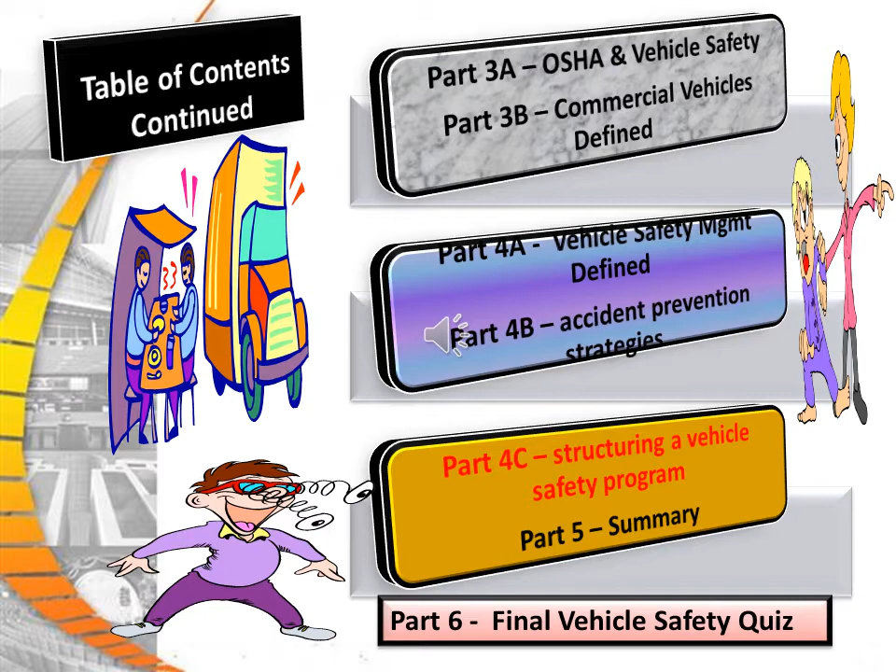Part 1, Introduction to Vehicle Safety.

Work-related roadway crashes are the leading cause of death from traumatic injuries in U.S. workplaces. They continue to exact a substantial toll on American workers, accounting for nearly 12,000 deaths between 1992 and 2000. Deaths and injuries from these roadway crashes result in increased costs to employers and lost productivity.

Workers may be pressured to drive faster and for longer periods and to use technologies that may lead to inattention to driving tasks.

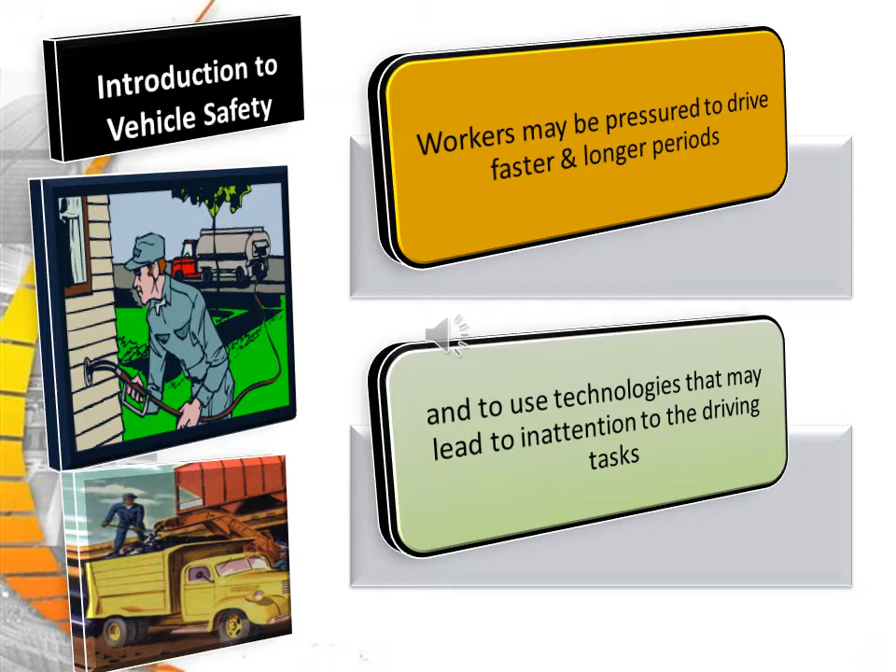We will review the main elements of managing both vehicle and driver safety, discuss OSHA's Division II rules for commercial and industrial vehicles, and talk about management policies on driver screening programs.

The total cost of a vehicle accident usually exceeds the amount recovered from the insurance company. The majority of all motor vehicle accidents are caused by driver error or poor operating practices. Companies can control driver error by implementing a program of driver selection and other management controls.

A vehicle safety policy statement is absolutely necessary, and it should be vigorously supported by top management. A vehicle safety program administrator should be a position occupied by a member of top management. And the driver selection program should contain some important selection criteria.

A vehicle safety program's main components include a written safety policy statement developed, supported, and enforced by management.

A vehicle preventative maintenance program will include inspection reports, detailed service logs for each vehicle, an efficient system for accident investigation, including emphasis on fact-finding, interviewing, detailed reporting, root cause analysis, along with appropriate corrective actions and follow-up procedures to help prevent future accidents.

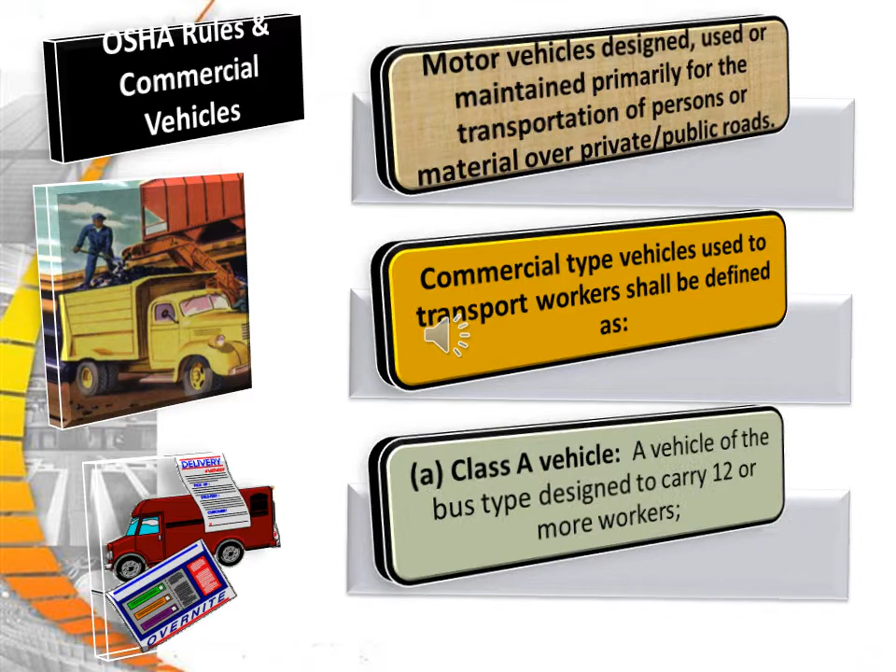Class B vehicles are vehicles especially built and accommodated for transporting work crews in compartments separate from space used to transport supplies, tools, and equipment, such as vehicles commonly used by public utilities. A Class C vehicle will be a vehicle of the flatbed or pickup body or dump truck type, or similar open body construction.

Class C vehicles operate near power line requirements set by OSHA, explained in OSHA's vehicle components. Flashing warning lights are required by OSHA, and the construction of the vehicle is also specified by OSHA.

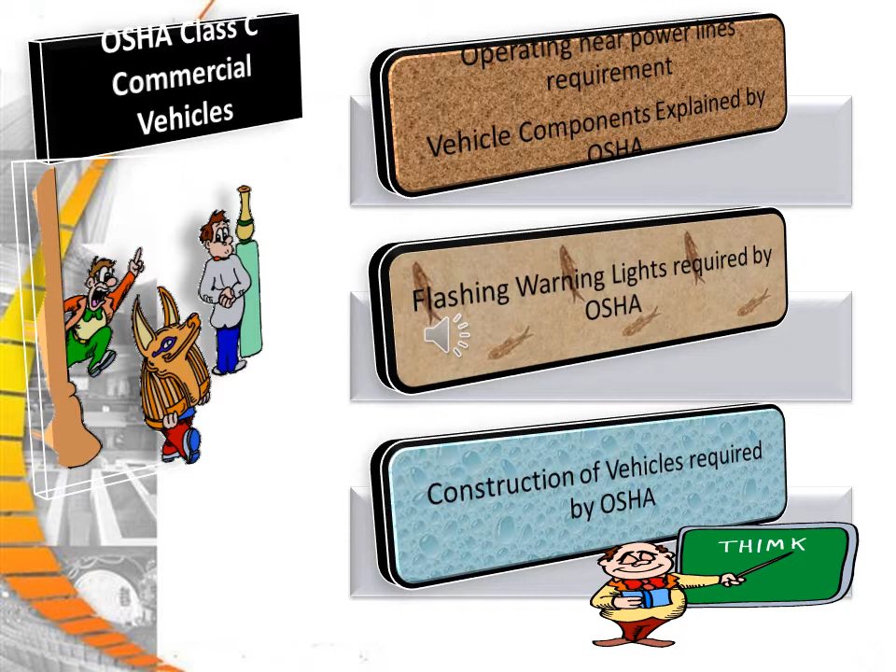Class C vehicles are prohibited from hauling explosives. They are required to have overhead protection, and they may be flatbed trucks, dump trucks, or pickups, not to be used to transport workers, with a few exceptions.

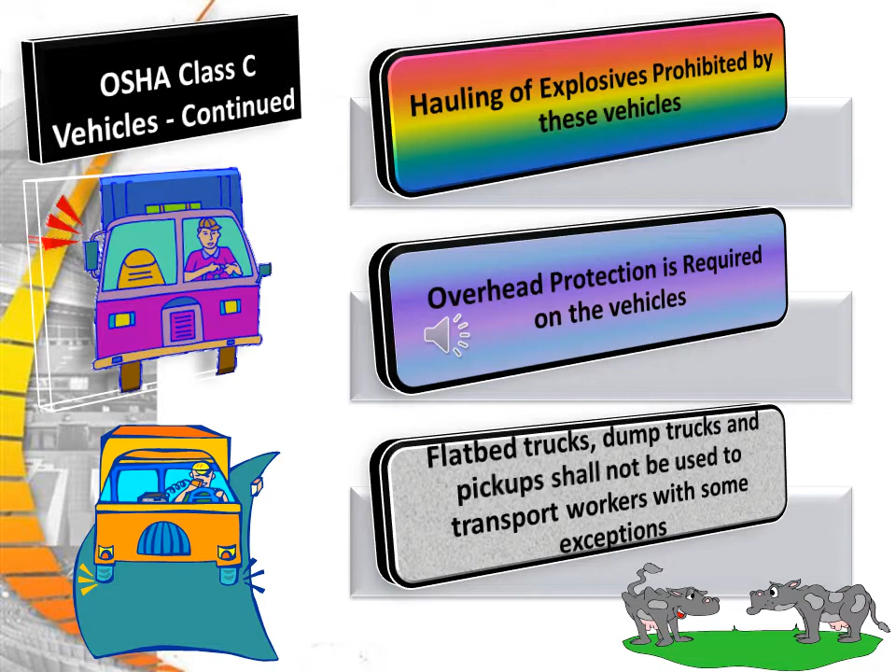OSHA's commercial vehicles also define Class D vehicles, which is a vehicle of the passenger car or station wagon type.

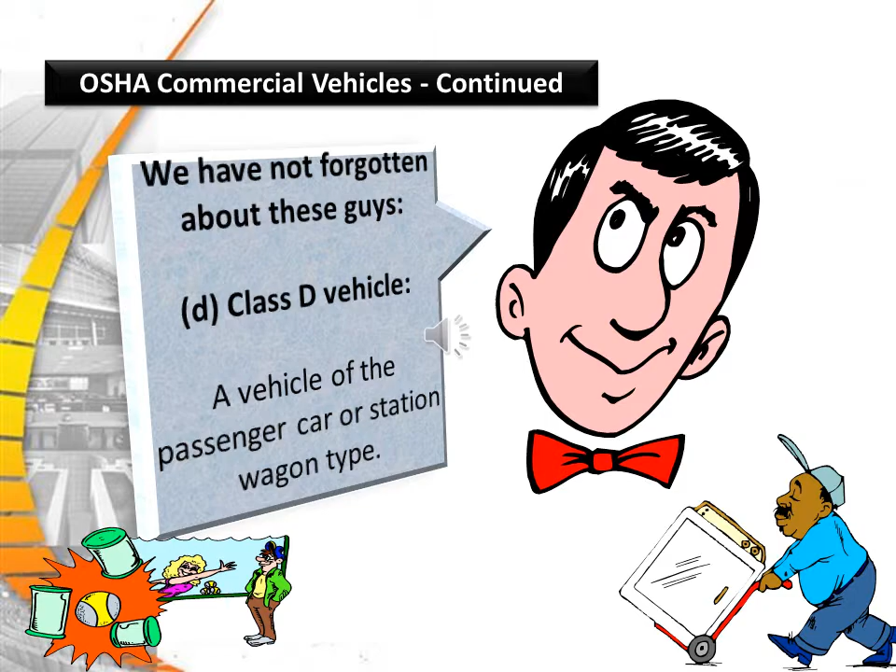Industrial type vehicles are defined as vehicles designed for non-highway usage, primarily for pulling trailers or other mobile loads, straddle trucks such as lumber carriers, powered industrial trucks, or other types of vehicles designed especially for handling materials.

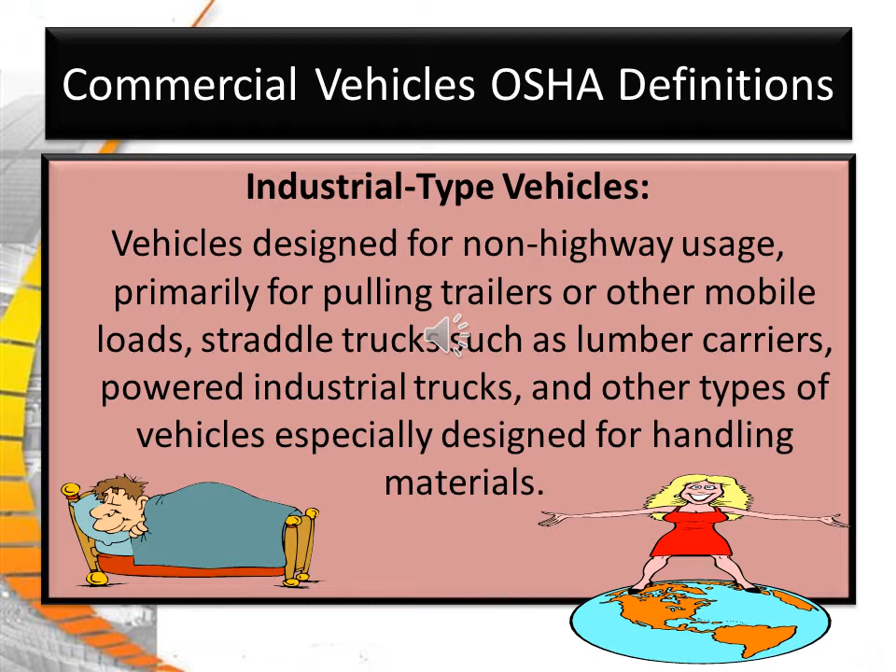The number of passengers or standees, as well as the passenger compartment, is defined by OSHA for Class A, B, and C vehicles, and OSHA sets a maximum time or distance permissible for standees. The vehicle should also have passenger compartments as well as windshields and windows in good shape.

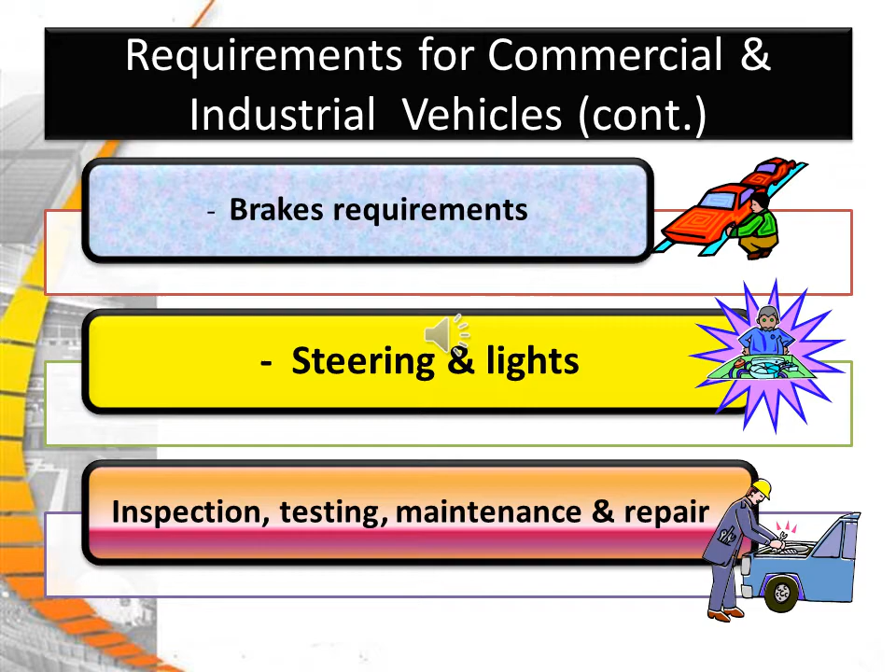Requirements for commercial and industrial vehicles include brake requirements, steering and lights, as well as inspection, testing, maintenance, and repair. The control of exhaust gases, sun shields, safety equipment, and fire extinguishers are also listed in OSHA's requirements for commercial and industrial vehicles.

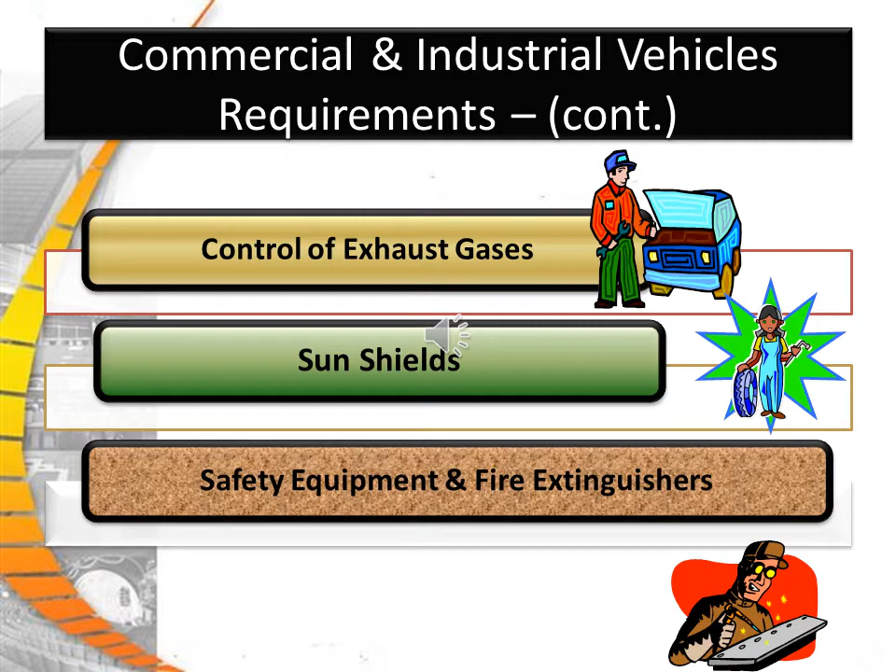Safety chains and the towing of vehicles are under OSHA's requirements, along with coupling devices for vehicles, as well as signals and controls.

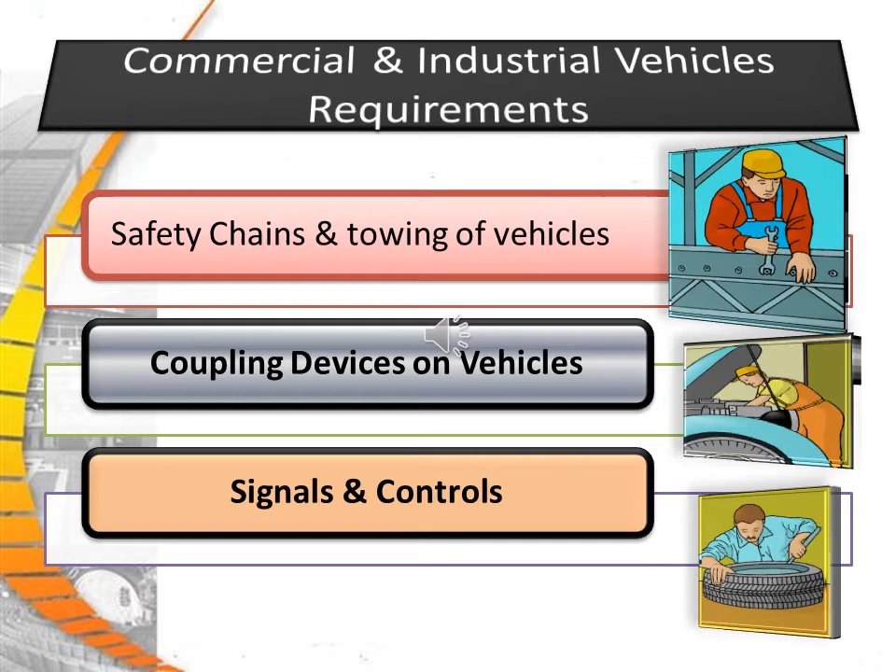Part 3, Managing Your Vehicle Safety Management Program.

Hazmat transporters must abide by other regulations, including DOT, PUC, RCRA, as well as OSHA. Continually communicate with the drivers, involve the safety committee to establish and monitor the communication channels, as delaying or unreported maintenance issues eventually causes more expense.

All vehicles should have accident packs which have proof of insurance, a contact call list, a camera, forms, and other devices if needed. Ensure that the vehicle safety devices are provided and maintained, and don't forget the maintenance of shop safety by servicing and maintaining equipment, jacks, and chemicals.

Roadway crashes are the leading cause of occupational fatalities in the United States. Who's at risk? Anybody who operates a motor vehicle as part of his or her job is at risk of being involved in a roadway crash. Actions of other motorists may cause work-related crashes.

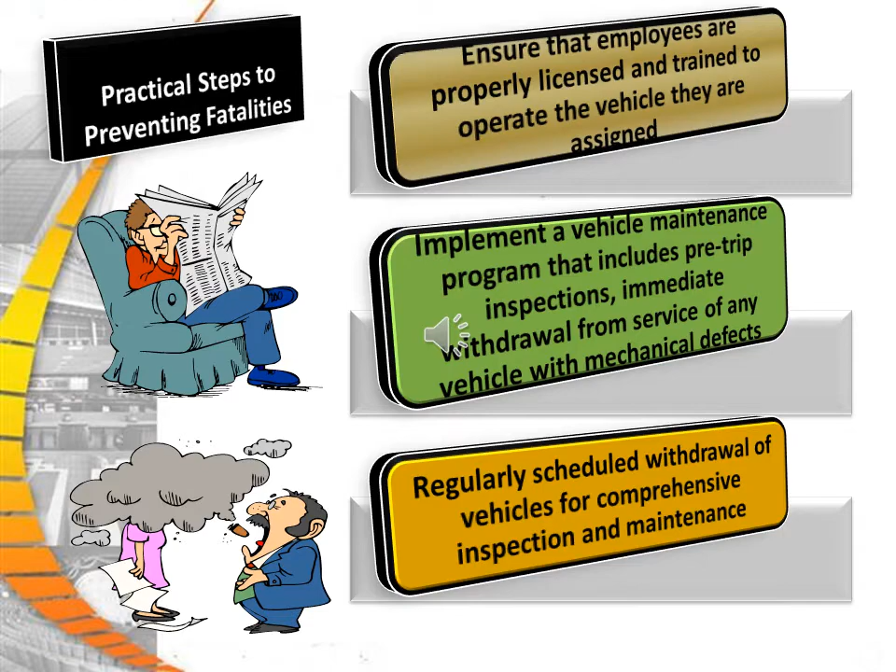Here are key components in structuring your vehicle safety program. Develop a hiring criteria. Use an employment application. Always use reference checks and motor vehicle records. Do road tests pre-hiring and post-hiring. Have an indoctrination period. Do preventative maintenance. Assign vehicles to specific individuals. Do vehicle inspections. Have an incentive program and accident analysis.

Section 5, Vehicle Safety Summary.

Key elements in a vehicle safety program are operator inspection of the vehicle, scheduled maintenance, vehicle replacement when necessary, accident review by safety committees or top management, accident reporting procedures, accident investigation procedures. Monitoring operating activities and creating and implementing incentive programs as well as promotion programs keep interest in the program.

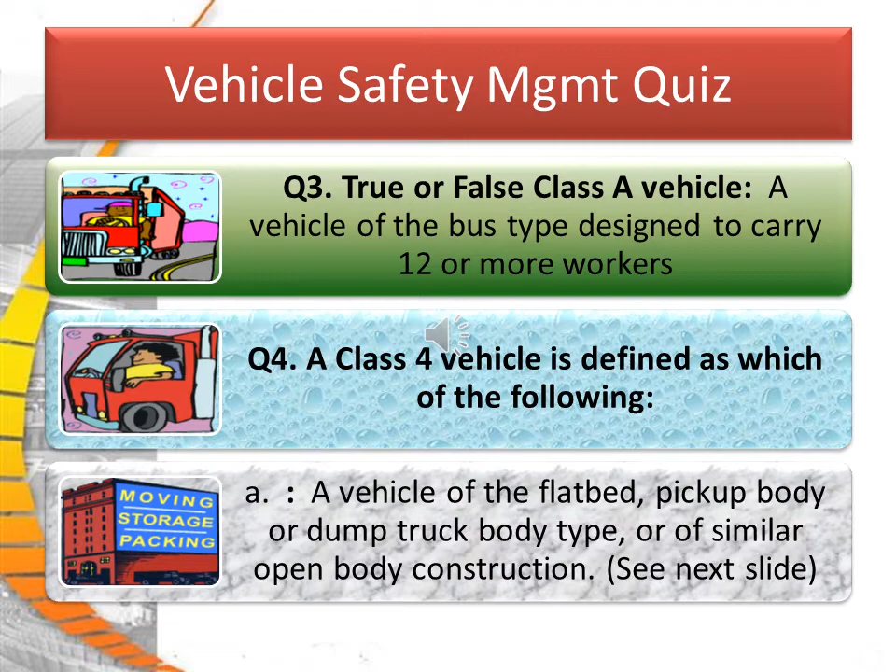Question 5, true or false? As part of a driver safety program, NIOSH recommended employers should provide a low-ranking member of the management team with responsibility and authority to set and enforce comprehensive driver safety policy.

The answer, of course, is false. You want a high-ranking member of management.

Question 6. According to the Bureau of Labor Statistics, driving accidents are the 4th leading cause of injuries to workers.

Question 7. True or false? 28% of all vehicle accidents involve semi-trucks.

Question 8. True or false? Bus-type vehicles having enclosed seating compartments of 12 or more workers, unless loaded from the rear, shall be provided with emergency exits not less than 20 inches or more than 48 inches on the left side or rear of the vehicle.

Question 9. True or false? The fleet accident frequency rate is computed by the number of accidents times 500,000 divided by the total miles driven.